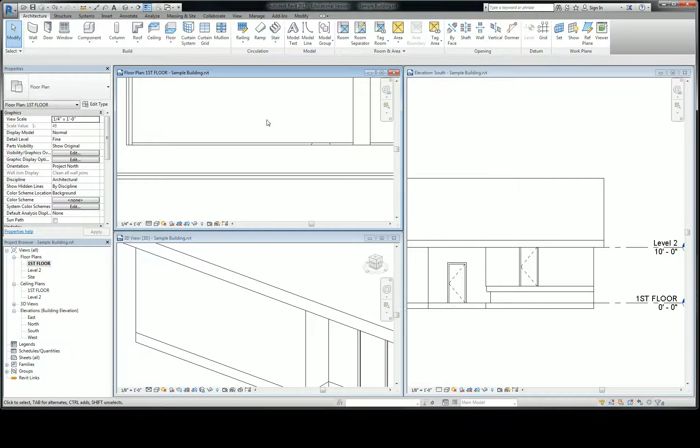Okay. So before we move on, I want to get us all there, and then we'll start looking at the pattern. I don't think we have that. Where's your properties? Can you go to properties? Yeah, it looks good. Okay, guys. So I noticed that some of you have a visibility issue. Let's take a quick moment to understand how to identify whether or not your wall is showing properly. You must understand viewport visibility properties.

In the bottom left, you have a bunch of icons right here. These icons are pretty useful and powerful. I'm not going to teach you all of them at once because you'll forget them. So I'm going to roll them out as we discover a need for it. So in this case, what some of you are seeing, I'm going to show you the case right here. Even though when you click the wall and you look at it there, you can't really see it. It looks like thick lines, but I'm looking at it on screen and I can actually see the layers are there.

So that visibility setting has to do with how fine or coarse your view detail is. Okay? Coarse detail shows you schematic design level line work all the way through your drawing. You're only going to see the exterior faces of that wall. If you switch it to medium, that's your first level going down into actually being able to see the materials themselves, the layers of the material. Is that clear?

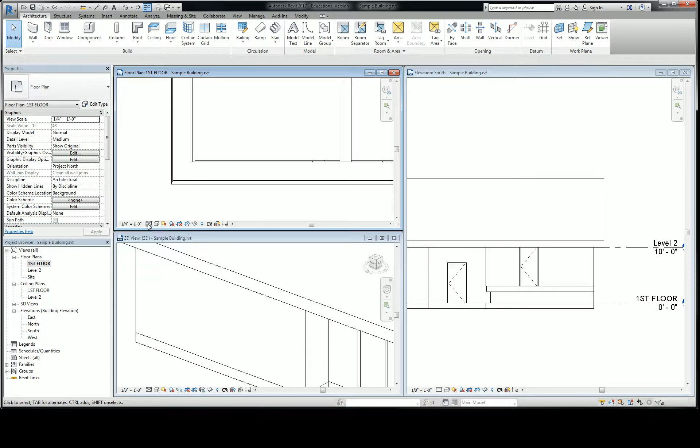Okay. All right. So moving on then, just make sure that your views, that view in particular, your plan view, is set to medium or fine. And then we're going to move on to modifying the pattern on that surface. That would be this right here that's highlighted in blue. So I'm going to hit edit, and I'm going to go back into the structure of that wall.

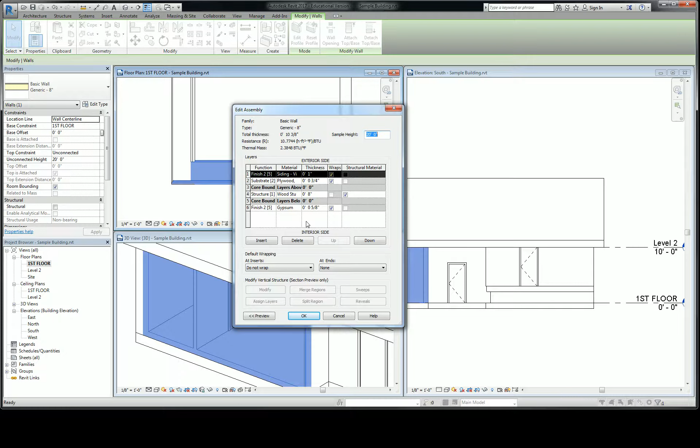Now, we have a couple of materials that have no patterns, and that's fine. That's the siding, that's the gypsum, the wood stud, the plywood. The siding is the one that needs a material, a pattern. The pattern is merely to represent that linearity of the siding itself. Okay, so in that material, open that up. We're going to edit it, and let's take a look over here in the right-hand side.

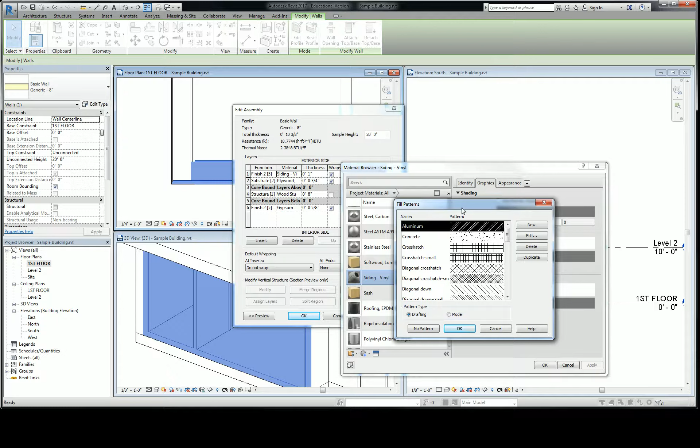The right-hand side has shading, surface pattern, cut pattern. Which one do you think we actually need? Surface pattern, right? Because we're going to look at it in elevation, and we need that pattern. So you go to surface pattern, and I'm throwing a lot of terminology out to you guys here. I don't expect you to remember it all in one go, but I must introduce this to you. We have drafting type pattern types, and we have model pattern types.

Can anyone venture a guess as to what the difference is between the two? 2D and 3D? Good guess, but not correct. Anybody else? Yeah. Construction drawings versus design drawings? Also a good guess. You guys are sort of kind of in the ballpark. It is a drawing related thing, but it also has to do with modeling versus drawing.

Okay, so the key difference between drafting patterns and model patterns is that one of them is scaled per the scale of your 3D model. The other one is scaled per the scale of the view that's on the sheet. Does that make sense? So if you have a pattern that says 6-inch spacing from line to line, and you have it on drafting, that will be 6 inches spacing from line to line on the sheet. Versus if it's model, it'll be 6-inch spacing on your model, and then it will scale properly with your sheet.

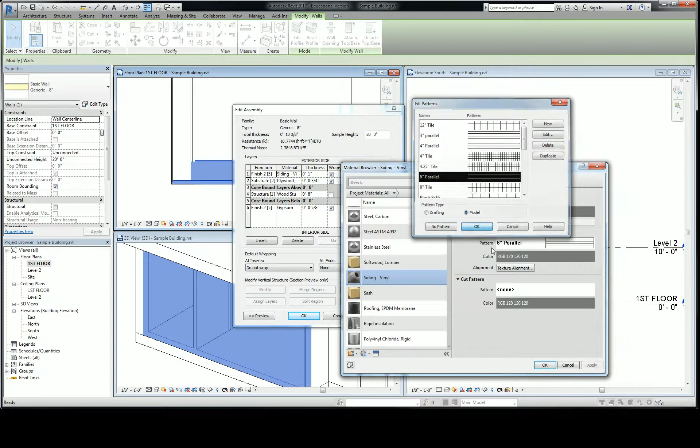Okay, so there are certain uses for each one. What we're going to look for is a model, and we're going to pick one that's appropriate for it. And you see here that it actually has inches. So generally speaking, if you're using a pattern on your building, you want it to be a model pattern. So we're going to take 6-inch parallel and hit OK. And then you can hit OK again, OK again, OK again. And there in elevation, you have siding.

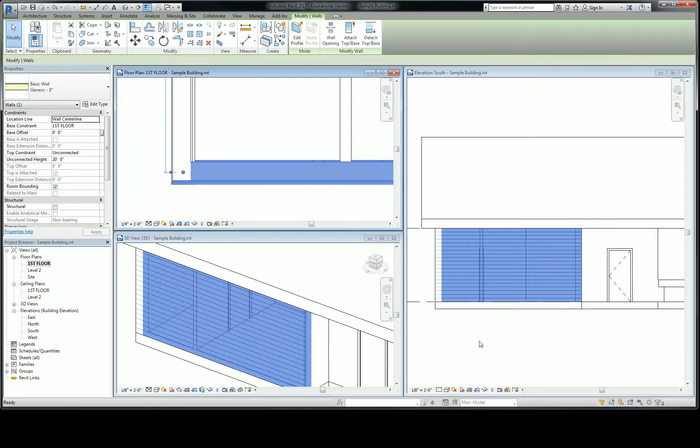Sure can. All I did was edit the wall type, edit the structure, edit the material, and then edit the surface pattern. Which one did you put? Okay, and I chose 6-inch parallel, then I hit OK, OK, OK, OK. That's it. What happens if you don't have the option? I don't have 6-inch parallel. Did you switch it over to a model pattern type? Oh, yeah. Okay. Cool. So the siding doesn't show up on the plan though.

It will not show up on the plan. Well, because it's cutting it horizontally, and if you look at this, right, that's the siding layer right there. What is there to cut? It's going to cut, I mean, I got you. Yeah. Does that make sense? Yeah, but I thought it would sit on top of each other. I thought it'd be 2 layers. There are 2 layers. So if you look at this here.

I'm going to show you real quick with dimensions. So that's our 5/8 inch gypsum board. That's our 3/4 inch ply. And this is our 1-inch exterior siding. So if you don't see that, then it's either a viewport property thing or maybe the construction. 1-inch siding will be sitting on top of 3/4 inch plywood. It is. So you'd see the plywood and the siding.

You do? Yeah. This is, so you've got plywood there, and then you've got siding on this side. At least on mine you do. Whoops. Your construction might be a little off. I'll check yours out in a second. Yes. Oh, I think my... Okay. I'll come troubleshoot with you guys, and then we'll move on to the next thing.